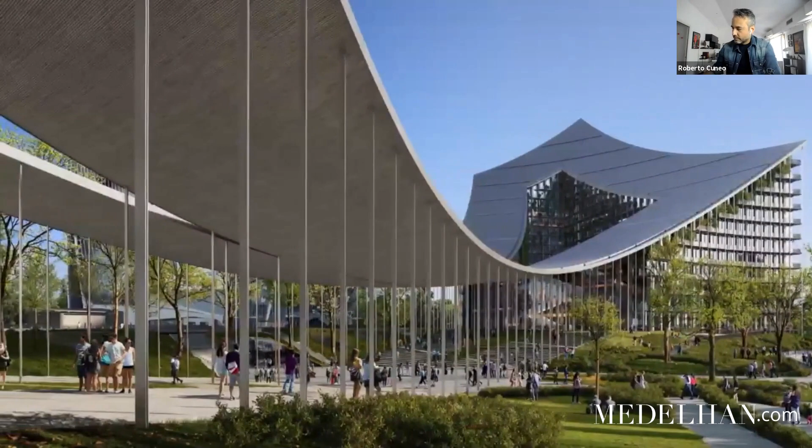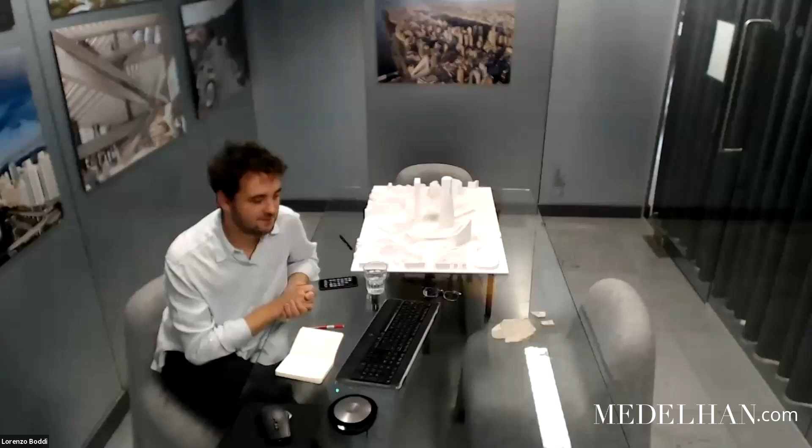Thank you very much, it's a great pleasure to be here. Thank you for the introduction, really a high, good level introduction. Thank you very much, it's a pleasure.

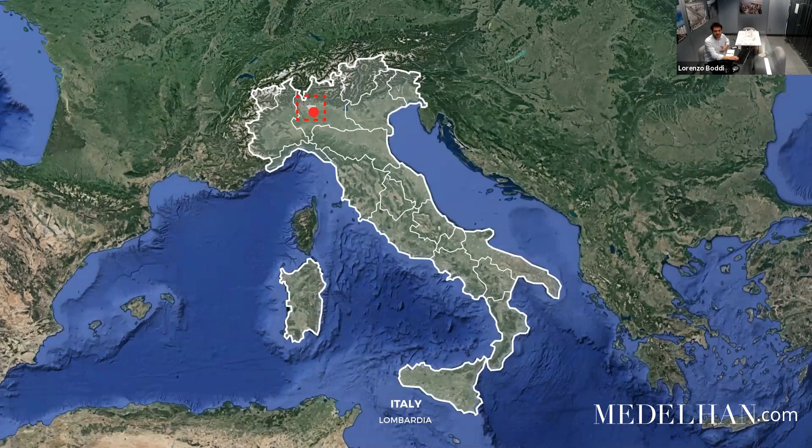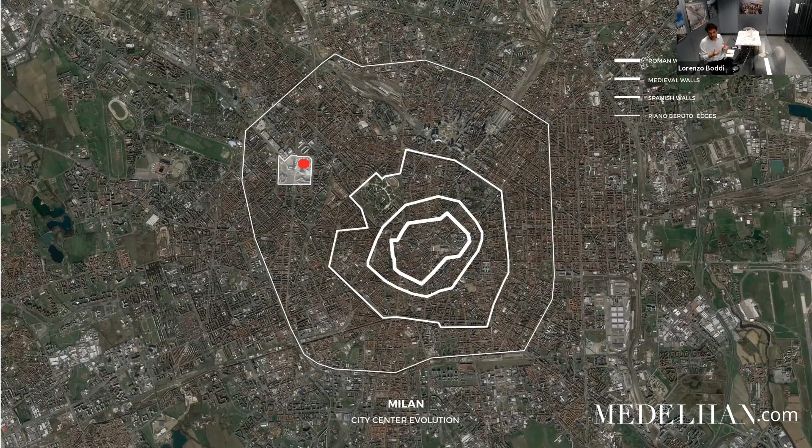The CityLife site itself you can see here in the red dots. These circles are actually the walls of the city, and the last circle is the Piano Beruto of 1884, which is when Milan exploded in terms of demographics. So the site is outside the historical city center but inside this historical area—a very central site in the current development of the city.

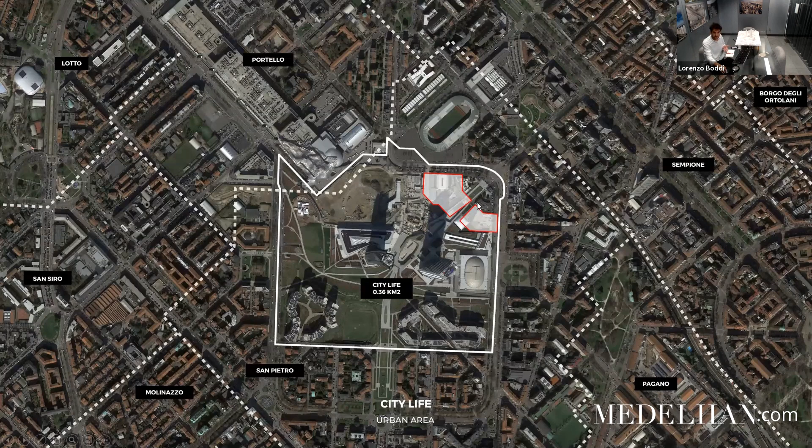This is the plot itself. It used to host the city fair back in the days, and it's been through one of the biggest projects of urban regeneration in Europe—about 0.36 square kilometers. It's a big site, mostly completed, but these two plots were where we were intervening. They're separated by an element where we couldn't build, which I'll explain a little later. That's a constraint you can start seeing from here.

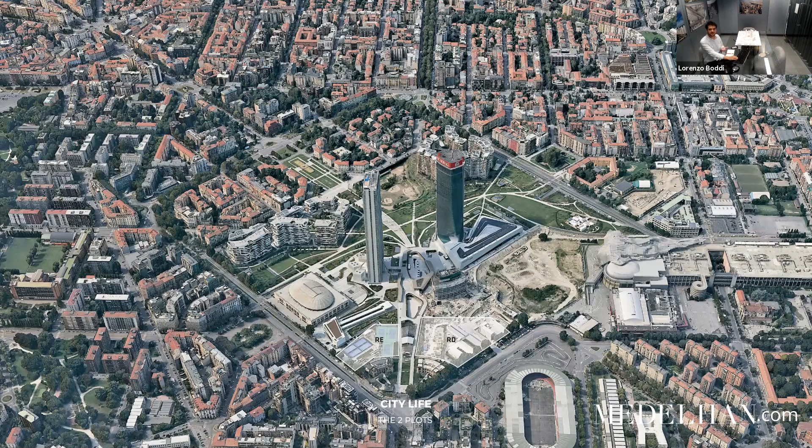One of the main aspects when you go to CityLife is, of course, the presence of this great park, but also the presence of the three towers. One is already completed in this picture; it was under construction at the center, while the rest is lower building. These three towers are done by three renowned architects—Hadid, Arata Isozaki, and Daniel Libeskind. So we had the responsibility to make the missing piece in the puzzle of this great urban regeneration project.

Here you can see the two plots. Now they're playing padel and tennis there, but in the future it's being relocated, and work has already started on the site. The two plots are leading towards this central architectural grand finale in a way—they're really standing in the city itself.

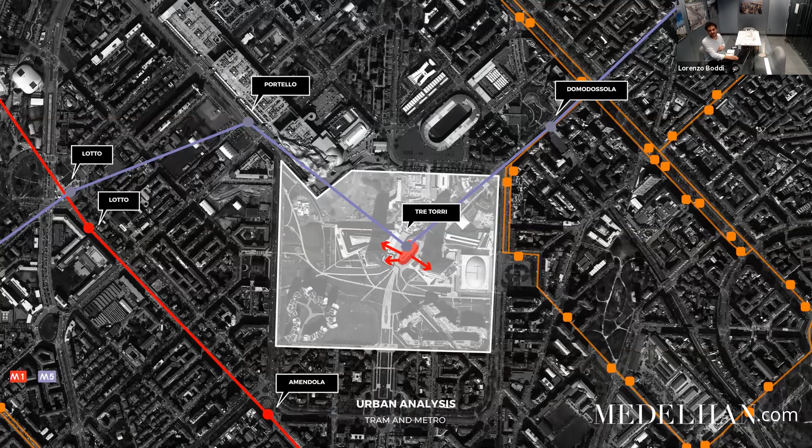Talking about this part in the middle where you couldn't build—one of the constraints—you have the presence of these three majestic objects, and at the same time this gap on the two sides represents more than one aspect. One is, of course, infrastructure: you have one of the metropolitan lines, what we call the tube in London, in Milan it's line number 5. At the same time it's the access and drop-off point toward this transformation area, while the rest doesn't have that.

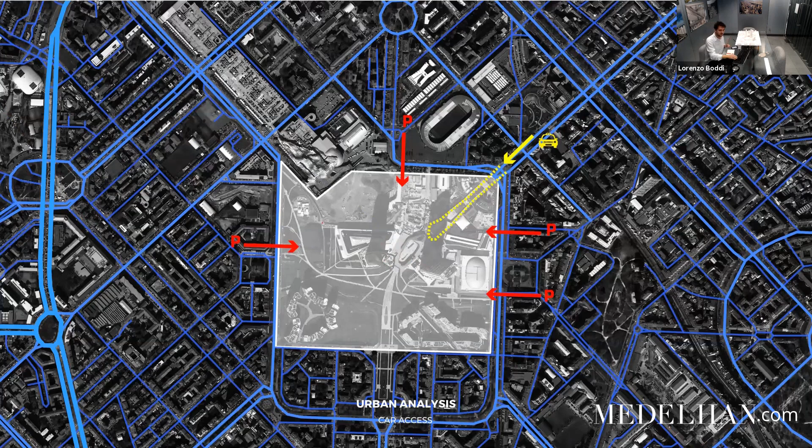You see it's all white while everything else is blue in this diagram—the blue is the vehicular traffic. There are no cars here; they're all underground. Everything is pedestrian, so this entrance point, this axis in the middle, was the exception. You can see here all the pedestrian flow.

So it's a great park—incredible, one of the largest parks in the city of Milan itself. It's all suspended on the circulation below. And then we started thinking in our initial research about why we actually couldn't build there.

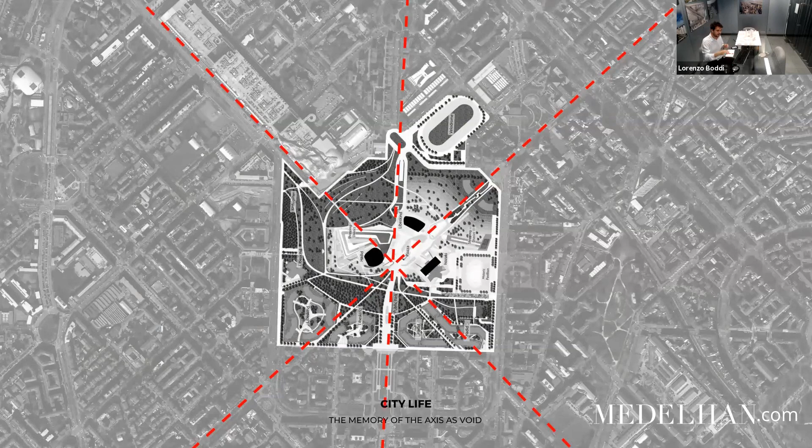It's not only about the metro. Historically this central axis was an important infrastructure, because back when the fair was there, it was the infrastructure leading and distributing to all the pavilions. You can see here the central axis leading to all the pavilions—an important historical axis. Nowadays it's still there in the form of a void. If you look at all the development, it's missing the central part—there's a void, together with the other axis, in the central part that's now called Piazza Tre Torri.

So there's a presence of the axis—this was one of the main inspirations at the beginning of our research. We started looking at axes in the city of Milan and also in urbanism in Italy generally, and usually next to an axis you always have two buildings, often twin buildings, like in this case. This is one of the first skyscrapers in Milan, at Piazza Piemonte.

It's a very old picture. Or in Piazza Larengario, obviously in Milan, where you have two twin buildings, again divided, creating an entrance to axis, or Porta Sempione.

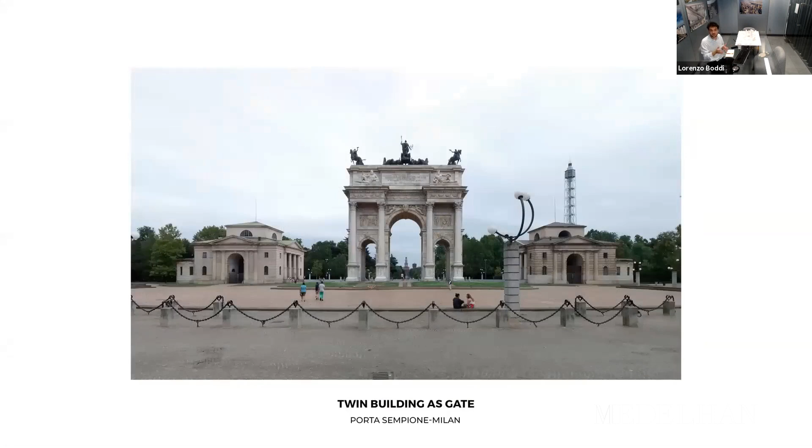But of course you have a corso, usually an axis when next to a porta, so there is a gate, an urban gate in the city of Milan. It's called corso, and in this case it's really a gateway, an entrance, a gate. So this idea of the gates, the idea of the axis, the idea of two buildings siding them, it was actually starting to come into our mind. So we really start thinking about the context.

Another aspect of the context, of course, is the height difference. This is a map that represents the lower and higher architecture of the surrounding. The red is really high - you can see the three towers, they're the only ones. While the surrounding buildings are quite mid to low rise, about 5 to 10 stories high. So it's really the only element that's tall is the one in the center.

That was one of the biggest challenges, basically the biggest risk of the project itself. But then we start thinking, is it really the right thing to do, also in respect to the 3 towers in the center? We can't really beat them because we can't do something taller than them. How can we actually - we start playing with different typologies, something we often do, and we find out that the same amount of area could be organized in 2 low buildings organized around a central courtyard, much more similar to the surrounding itself. It's a classic Milanese, but also European typology, the courtyard building.

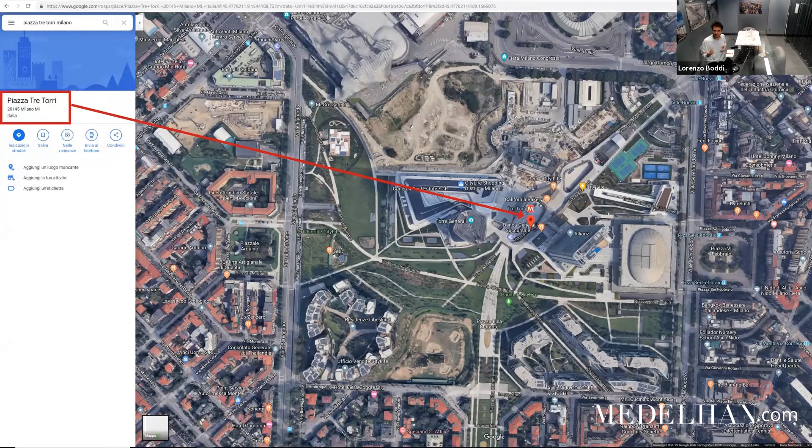At the same time, we also start running some jokes in the office, because the station and the plaza in the center is called Tre Torri - in Italian it means 3 towers, you know what I mean? So we're like, okay, they're asking for a 4th tower. What are we doing? We're going to change all the name of the station and stuff like that. So it's like, we start really thinking maybe the tower is not the right thing to do.

So we try several iterations following this idea, the idea of the 2 buildings, the idea of the axis. And then I'll take you step by step how we generate what looks like a complex project, but it's actually very rational in its generation.

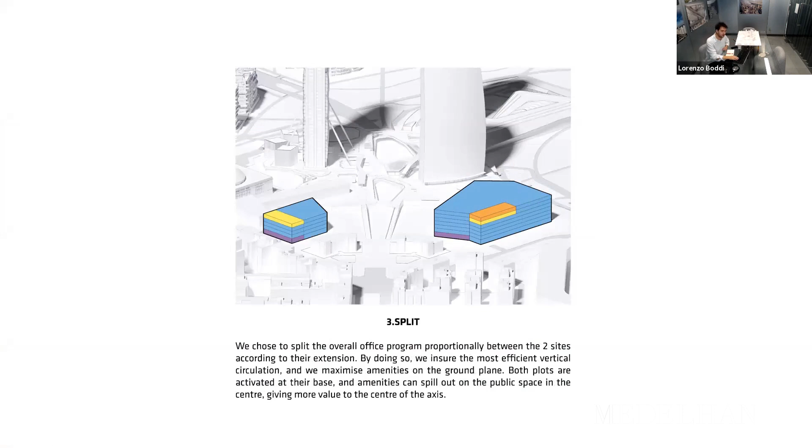We have the 2 plots, as I was saying before, with a buildable area in the central part. The program itself is a mixed-use building, but is office-driven mainly, so you have office and a series of amenity spaces and a few public functions. We decided from the beginning to split this program in 2, detaching from the 1 building only, having 2 buildings, and then organize them as a courtyard.

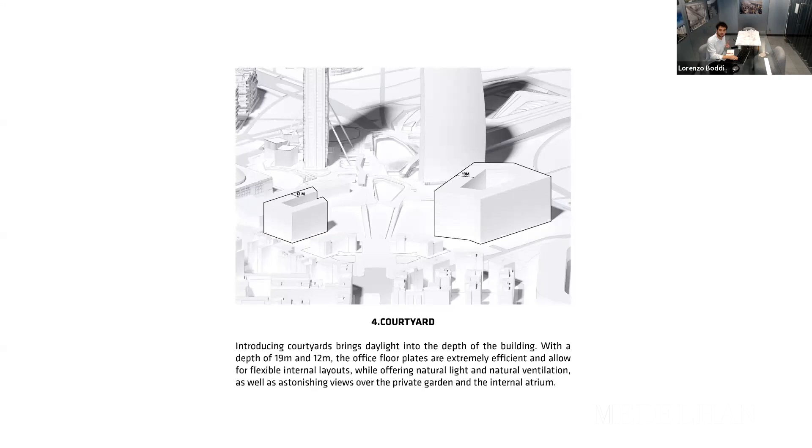Courtyard as an office space is usually not what you think about as a classic typology, but we think it's actually a great typology. You can have a depth, for example, of 12 or 19 meters in this case, that will allow natural light to come in while having a really large floor plate that will allow collaboration. So it's really a great typology for office, not only for housing.

Then you unify in a gesture in plan the building with a single gesture, as you can see here, and we did the same in section - I will come to this later. So in a way, it's a building generated by constraint and by surrounding in plan. And in section it's also generated by another constraint, because the curve that we use is a catenary curve, so it's almost like it is shaped by gravity itself.

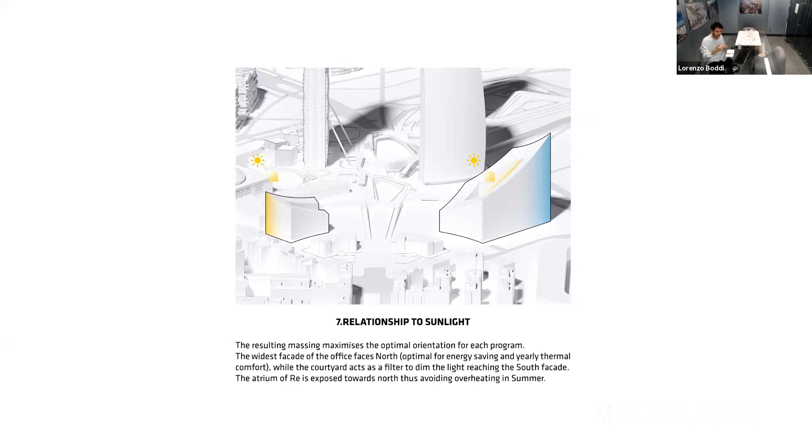And then by the found object with this iteration, we actually discovered it was a perfect office building because it had the biggest facade facing north, while the lower facade facing south, allowing light to come into the courtyard. While the smaller building, probably too small to have a proper open air courtyard, was formed into an atrium facing north. So everything started to click together in some ways.

And when it started to do that, we got really excited about the scheme itself. At the same time, it was creating an object that has a plethora of views toward the surrounding, towards the three towers in the center, towards the city center, the Duomo with the lower building. And with the biggest building, on a clear day you can see all the Alps, all the way to Monte Rosa. So it's an incredible view from up there.

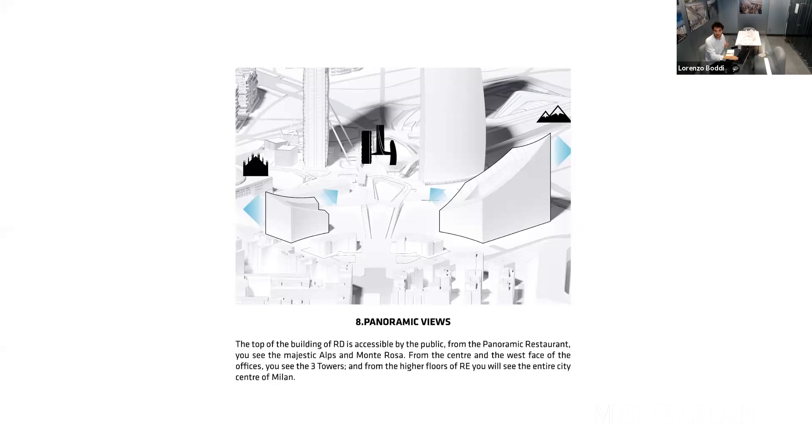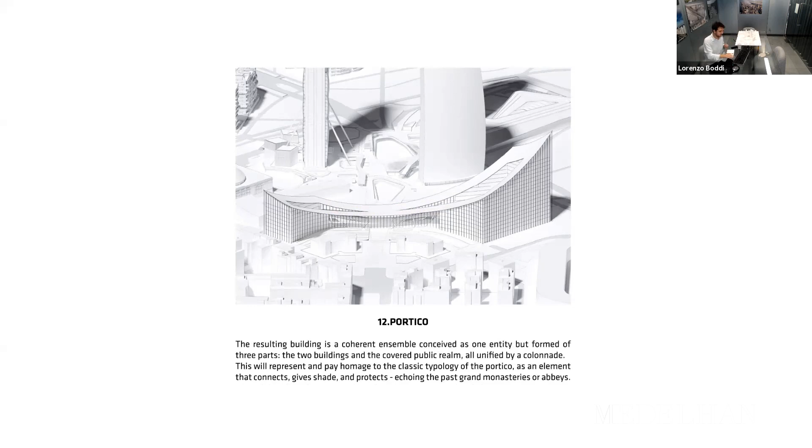Then finally, we transformed what was a constraint itself in the site, this unbuildable area given by the infrastructure in the middle, into a design opportunity. So we decided it was a way to give a gift to the city of Milan, to create a giant covered space that is actually a monumental stair you'll see later. And then we unified the entire facade with a series of very thin elements that are in tension.

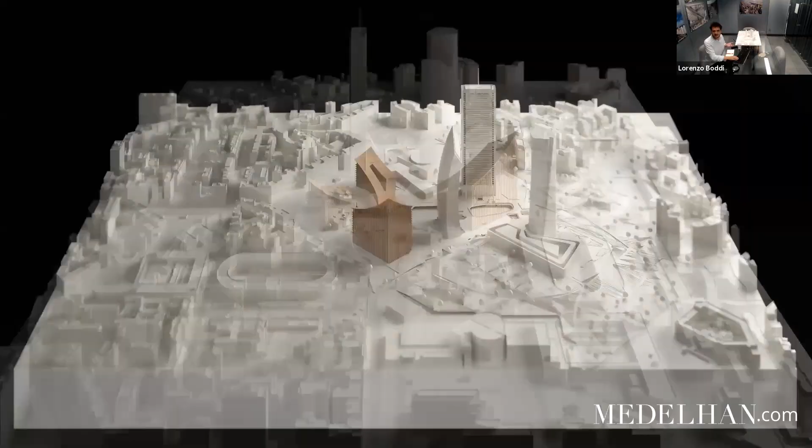These are all aspects I'll go through later following the project in more depth. So we started really thinking, okay, let's make something low, let's make something incredibly almost tame, to mostly merge with the site. But actually, when you start applying all the constraints, we found out this was an incredible landmark. I think you can see from this picture it's a building that appears different, very sculptural from every side, while at the same time it pays respect to the central part.

You can see here a model, and finally these are the images that we actually found ourselves, also after generating the scheme, saying like, wow, it's actually screaming, even if it's a lower building than a tower.

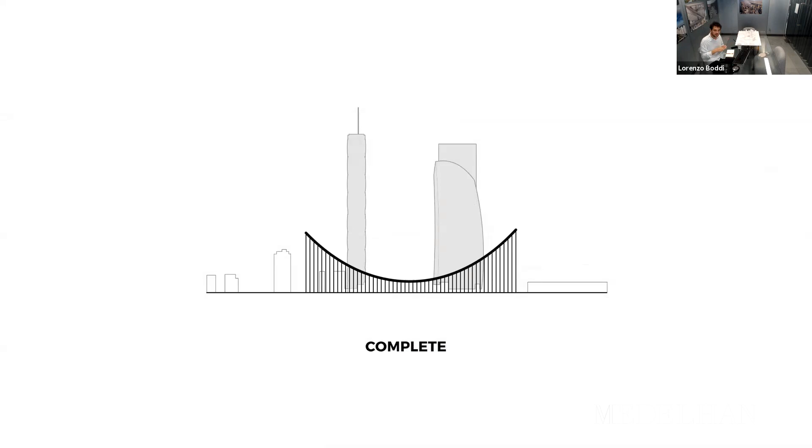So we can actually change this perception. The main idea was from the beginning, rather than try to compete with the three towers in the center of the space, to actually complete the entire regeneration project of CityLife, creating a lower building but also framing the three towers in the center, and creating this gateway to the side, to the entire urban regeneration project itself.

And you can see here from an aerial view how it really allows people to walk in from Viale Monte Rosa towards the central plaza itself, framing and creating a new gateway to CityLife.

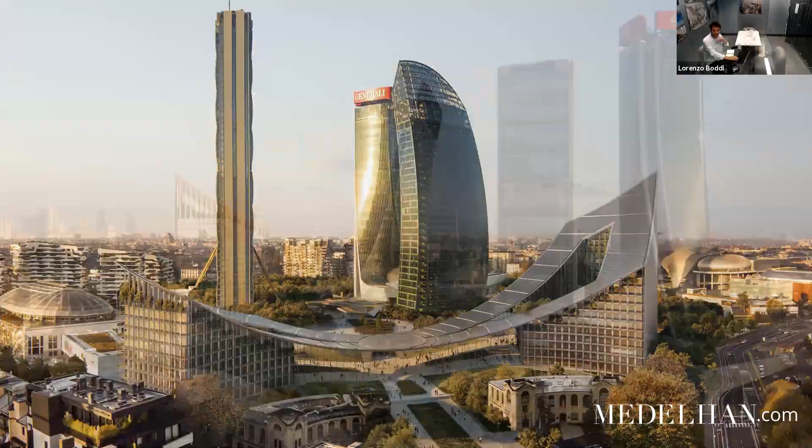While changing the corner of the views, you can have almost like a sculptural object in the park that is actually a sculpture park. So it's quite spot on as an object itself.

And here you can see also from street level how really this idea of a gateway, going back to what I showed you before in terms of inspiration, the twin building — of course, in our case they were symmetric, but here they are completely different. The idea of framing and creating this gateway in a central axis, you can see really in this picture how it was done.

We're talking about challenges, and definitely challenging the brief is one of the main ones, I guess. Every time architecture firms are asked to realize something which is not feasible or doesn't fit well with the local scene — I get that. When we did the competition, we were actually aware that either we'd arrive last or we'd arrive first. There was no in between. So that was the risk in a way. It went well, but that's a challenge as well. That's what makes architectural firms great, when they challenge the status quo.

Looking at the pictures, I see that one of the innovative aspects of the construction is actually the novel understanding of the portico structure, which comes out from the pictures as well. How did this idea come about, and how did you get inspired for this part? I'll take you through the overall thinking, first as inspiration for us, and then also some of the technical aspects and the big challenge, because that's possibly the biggest challenge of the project itself.

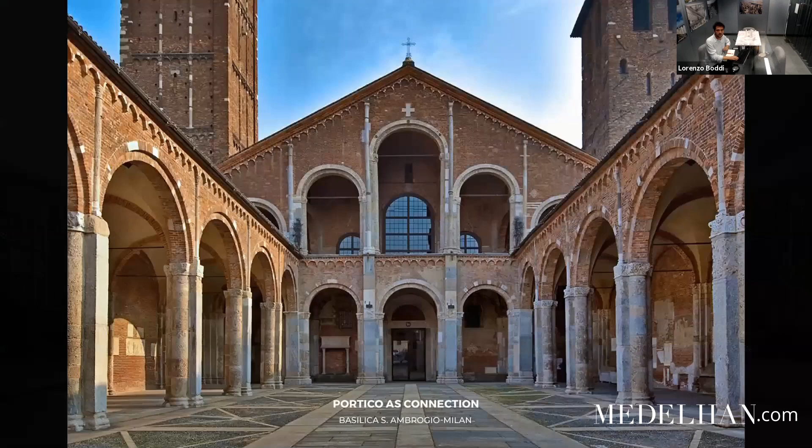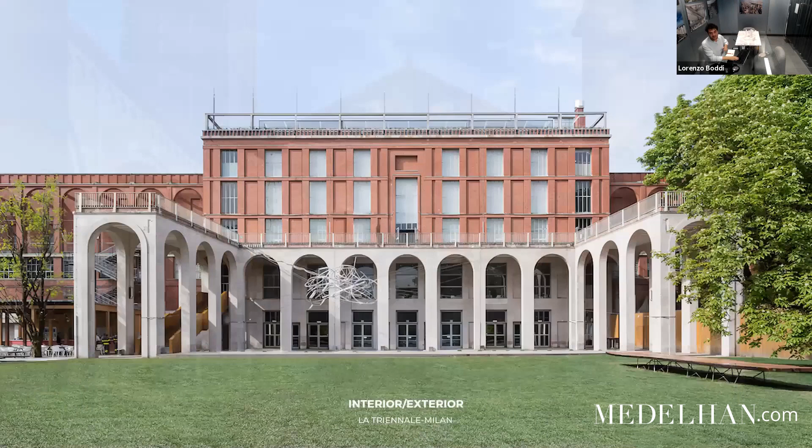Of course, the inspiration was from the portico itself. The portico is a device that in architecture, especially in Italy, is used to resolve a series of issues, and is actually a characteristic of our city. It's used, for example, in the Basilica of Sant'Ambrogio as a connection between parts of different programs. It's used in a completely different historical time - for example in the Triennale in Milan, as this device that blurs the boundaries between inside and out, so it's neither inside nor outside. It protects you from the rain, and it's a shelter, like for example in the Mondadori quarter. So I chose three examples of how the same device has been used in different times in the history of the city of Milan.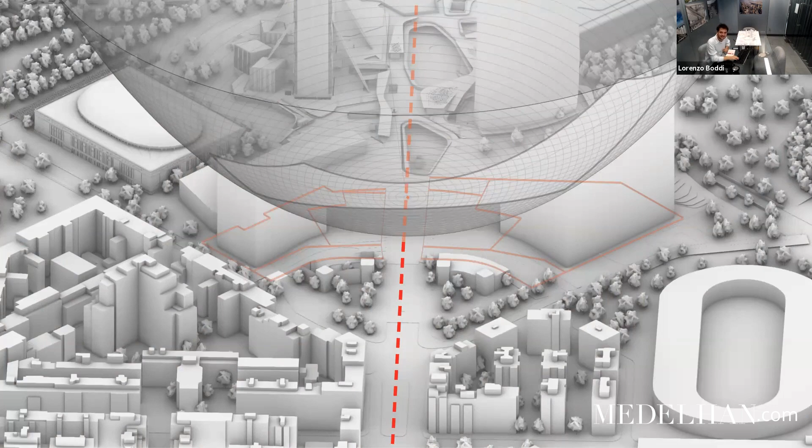How is it done? It's very interesting. As I was saying before, it's actually generated by gravity in a way, because the shape itself is generated by a catenary curve - a curve that is shaped by gravity itself - and it's revolved towards the central axis. You can see here in darker gray the geometrical element that's been subtracted from the shape itself.

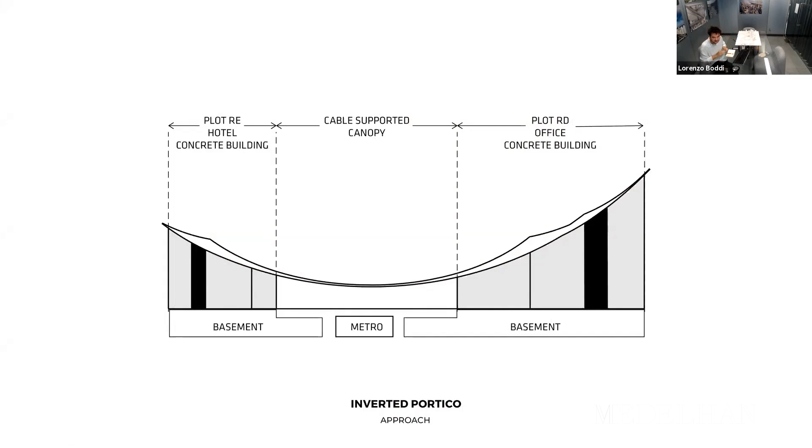You can see here how the two buildings - two relatively conventional concrete buildings - have this spanning element in the central part, where there's the non-buildable area and above, the metro line. This suspended part is so lightweight, because we wanted to do something incredibly light, but it was so light that basically it was suffering from wind uplift. So usually what you have as pillars in the traditional portico we saw before is something that holds the roof up, but in our case, we needed something that holds the roof down. That's why we started calling this the inverted portico.

So it's the same typology, the same inspiration, but reverted in a way. You can see a section showing how the spanning part works between the two elements. This has been done first with our engineering firm, BE, and after with Holzer Bertagnoli, a local firm - they're very good.

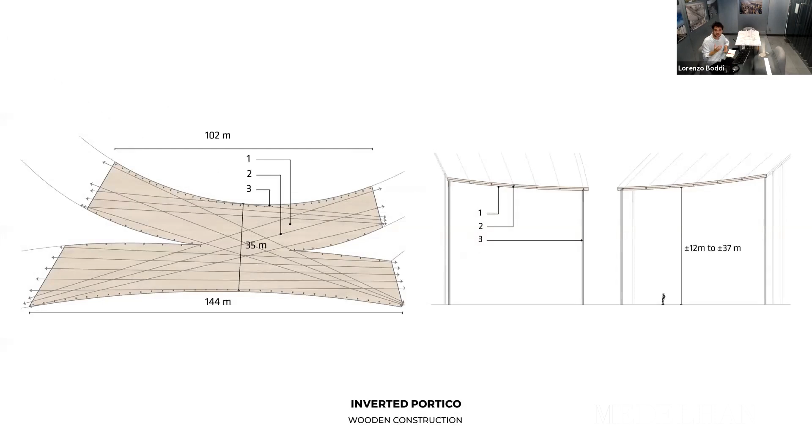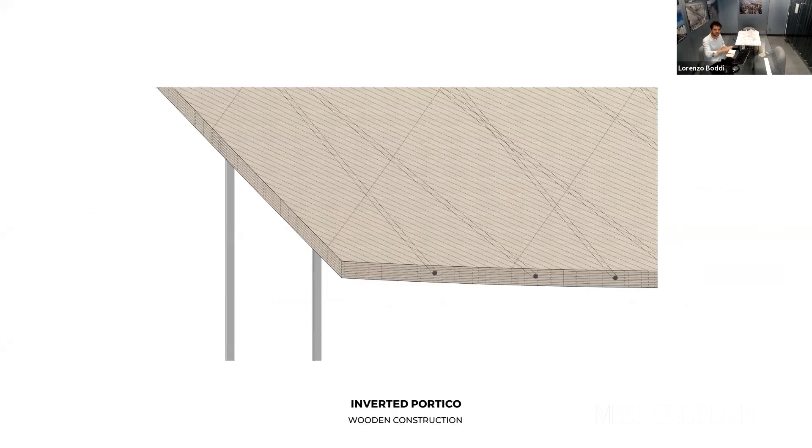And it's a wooden construction, so it's also very challenging in that sense. This is solid wood - a lightweight construction made of solid wood, together with cables in the central part. So basically, it's almost like a homemade CLT: you lay a series of solid wood elements in one direction, then lay another layer in a different direction, and so on until you get the thickness that is needed.

In the central part, there's a space that allows cables suspending from the two sides to take the gravity loads. At the same time, the wood enters inside the building, really unifying the suspended element outside with the more conventional of the two concrete buildings - which aren't conventional at all in terms of the picture, but are more conventional in terms of construction.

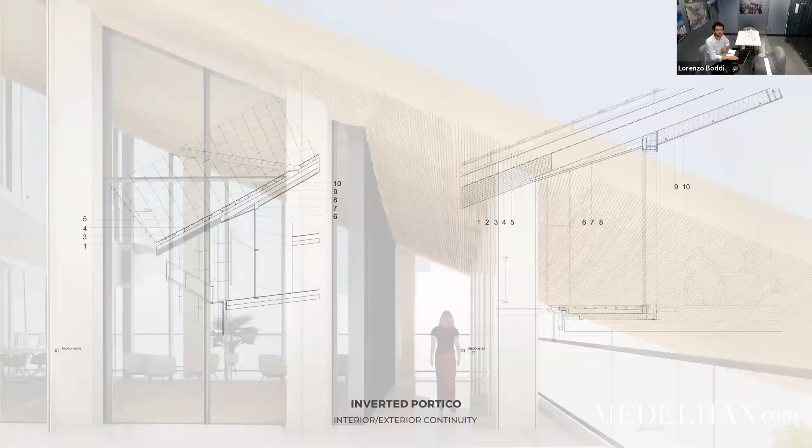You can see here - I'm not going to go deep on this - but how these two elements actually join, between the building and the canopy. It's a lovely idea, and even very impactful. I definitely see it as a gate of CityLife from that entrance, and it's wonderful to see how ingenious it was to find this kind of solution.

And we're talking about a building which is going to host offices as well. Yes, and I guess that even the common areas are something that got you to work on them.

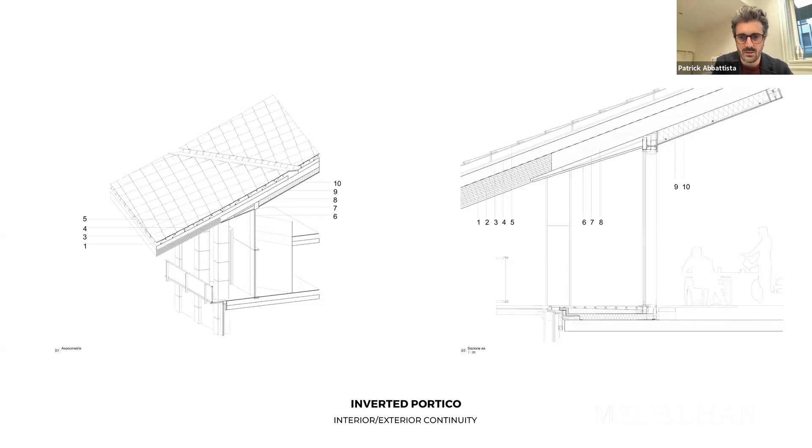Also, since it's not a unique brand building like the Google one you did, I suppose all these common areas are fundamental to generate life within the building, and also generating the possibility to connect and contaminate its inhabitants. I wanted to know how you've addressed this part in your projects, in the CityLife project.

Yes, that's a great point, Patrick. I have a chapter for it because the common areas are at the heart of the building, and common areas are getting more and more important in the office environment, not only, but actually in the office world they're getting more important.

Even more after what we've seen in the pandemic. So in the post-pandemic, what we can think, predict or try to predict, the office space of the future, the post-pandemic workplace, will have a great central core.

You probably experienced this. We did this project entirely almost in lockdown, so it's a project born during lockdown. Somehow at the beginning everybody was happy going home, staying close to loved ones, and being more free, having time to do a lot of things you didn't have time for.

But after a bit, especially the younger generation, you really feel the need, especially in work like we do where collaboration is really important, to be together and share moments. Even though the project was conceived before the pandemic, it's proven to be a resilient typology because of the common areas itself.

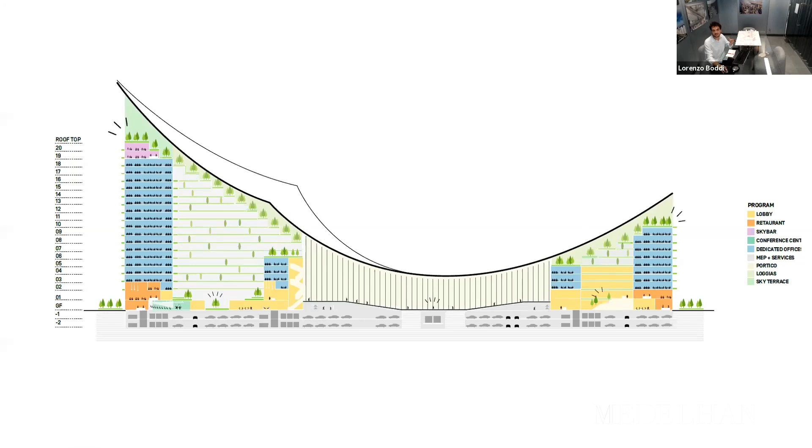The courtyard itself, of course, as common area, and the atrium in the building facing north - we call it the Milanese courtyard in the south facing building. I'll take you through one by one because they're really one of the biggest and most important aspects of the building itself.

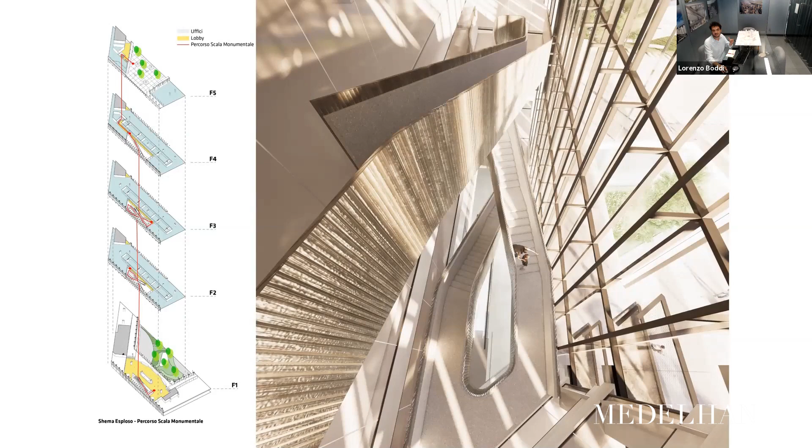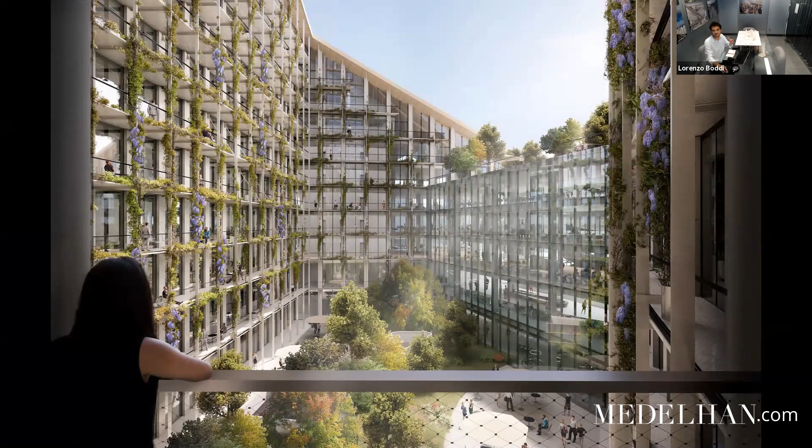Second one are the two courtyards. This was one of the advantages of not doing a tower. Of course, you can make towers with a collaboration space too, but in this case, having the possibility of making a lower building with a great shared space in the central part, it was actually a great occasion.

A courtyard like Ca' Granda in this case, or on a much smaller scale, for example 10 Corso Como, which was a great inspiration for us. We will see later also.

The courtyards will differ from the outside. We have this lush nature, so they are very, very green - I'll show you later how this is done. So it's very green, but still lightweight. They are also the heart of where all the air of the building will get through it.

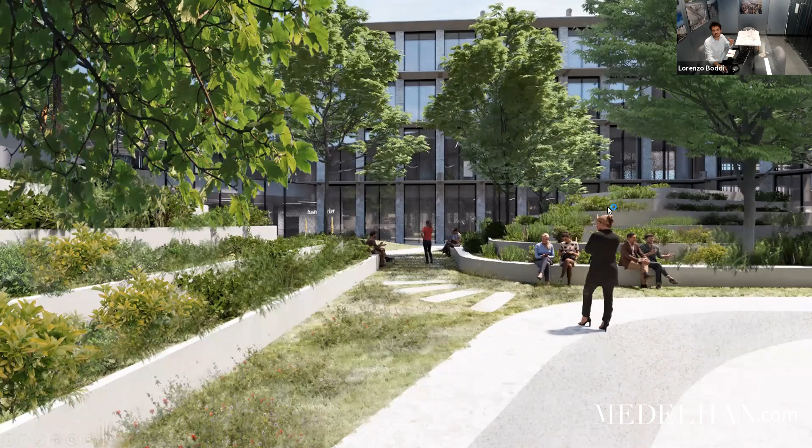Even some of the aspects - these are two elements, the chimneys you use for MEP, we turn into a possibility and a mark inside of the courtyard itself.

Going through, that's the space I was talking about before - the residual space in between the canopy and the slab, we left it empty, and next to it we always place a loggia that you can see here. It's also very green, an outdoor space where you can go out and exchange ideas with your colleagues.

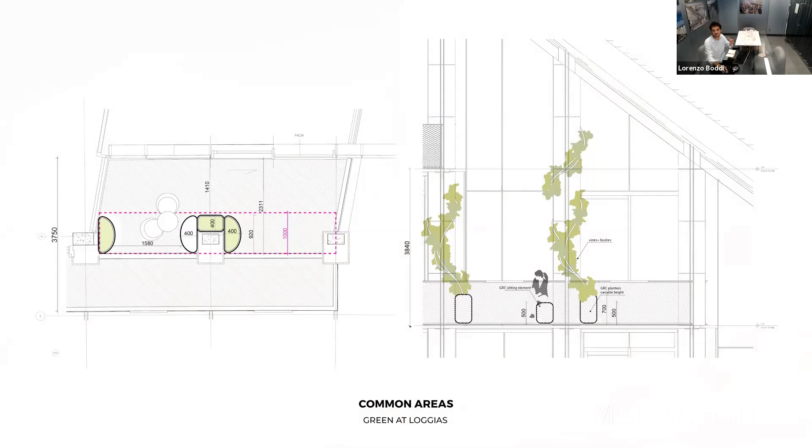This is some of the detail of how we achieve this even with the lightweight construction. This is done together with our landscape department, and we achieve actually this green appearance.

This is an interesting point because we could have actually left the slab touch the roof, but we decided, for the places where the height was not too generous, to remove the slab itself. This creates a cascading series of office spaces where you can work, and even in a multi-tenant building, or a single tenant building, you can see people working on another floor, maybe in another department, meet each other, wave, and exchange ideas. We think ideas could be generated from this.

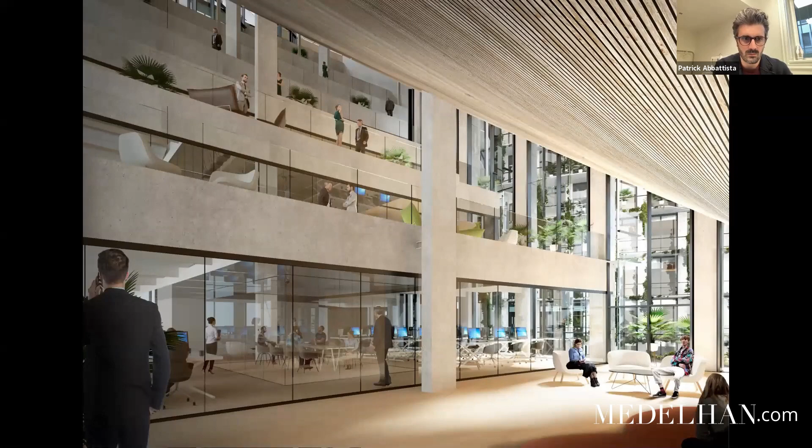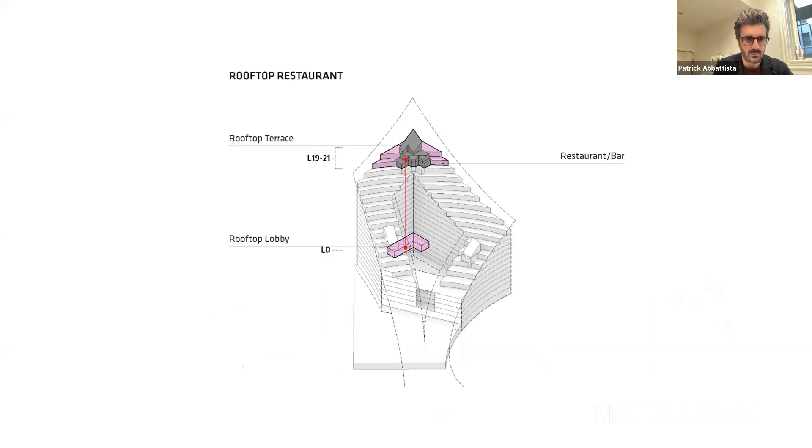So the culmination, as a grand finale let's say, of the common area: the last two floors have a rooftop restaurant that has its own independent connection, its own independent lobby, and it culminates in an incredible terrace from where you will see the entire Milan.

Again, this has been possible because usually you have the MEP on this level, but the organization of the building itself, being in a low rise, makes it much easier than in a tower for services, air, and all the systems. We could leave this free, so it was an early decision that made this possible.

And you actually have this incredible space. You can really see from here, you can see Monte Rosa during a clear day. So we think that common areas are really one of the main aspects of the building from the public.

An example of the portico running all through inside the building. And I can't wait to visit the restaurant when it will be live.

We are talking about common areas, and of course common areas, as we were looking at the slides, can be indoor or outdoor, and we know that the relation between indoor and outdoor spaces has changed in the last years. From your point of view, how does this project interpret the research for a new balance between the two?

Yes, well the building is really organized, as I was saying, as an extroverted building. It's introverted because there's a court—it's funny, there's this kind of contradiction—but it's extroverted because there's really always access to outdoor space. This has been done mainly through the facade system that I'm going to show you now.

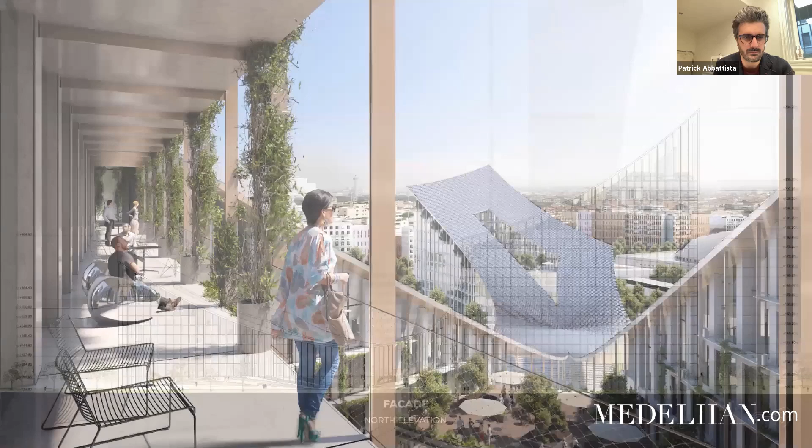You can see the building really starts from around 20 meters going up to 100 meters, and it's all surrounded by a series of balconies. So everywhere you have a really lightweight balcony next to your desk where you're working—next to you there's always a balcony you can access. In this case these are the largest ones; some are slightly smaller, around 1.2 meters, these are 2.4 meters, so very large spaces, as you were mentioning before.

Nowadays, I was talking about common areas before as important for collaboration in the post-pandemic work environment, but of course access to natural ventilation and breathing fresh air got more and more important. We always like to think: if you go to work in a completely sealed office, like a tower back in the days with no access to outdoor spaces, you work there for 8 hours and don't actually have contact with the outside. It could be anything outside.

So if you think about it, it's the same as taking a flight from here to New York. And if you think about taking a flight, it's not the most pleasant experience—of course you watch a lot of movies, but if you're working every day, it could be quite tough.

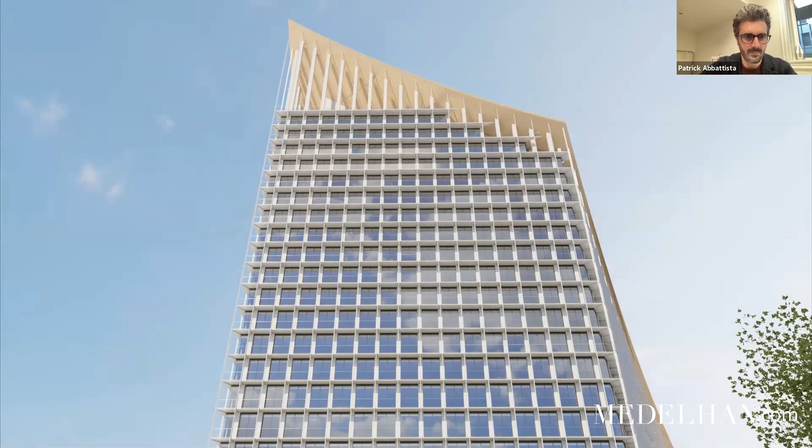Finding a spanning element of 3 meters in natural stone was not that easy. The way we achieved it is actually very interesting, because the facade itself is made of glass and natural stone in the vertical spandrels. In the balconies, we use the leftover material that you get during the production of natural stone. I have some here, and they're not big enough for the facade, but we use that, combined with ultra high performance concrete, to create slabs that are basically similar to the stone itself, because they're made of the same component. We managed to span 3 meters with only 65 millimeters, so we're talking about a really thin and lightweight element.

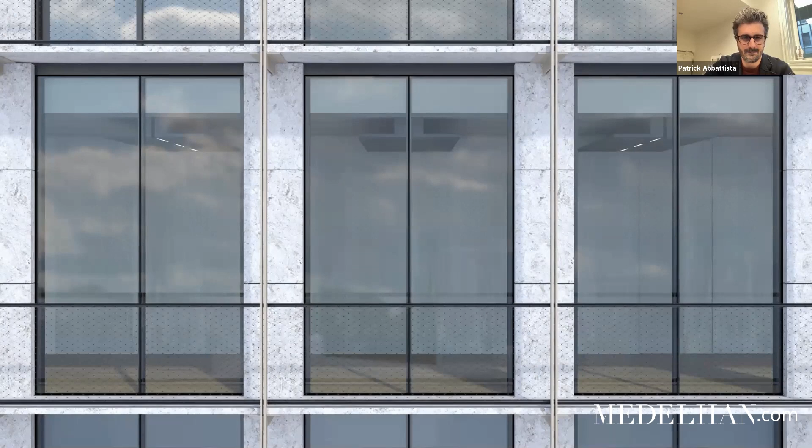All the balconies are hanging from the top. We talked before about the canopy, the inverted portico, where you have columns that bring down instead of bringing up the roof, they keep it down. In the same way, in this case the elements are in tension like the canopy, but here they're actually suspending the balcony. All the balconies are suspended by this hanging element. There are two blades of steel. You can see here the facade system with the two balconies.

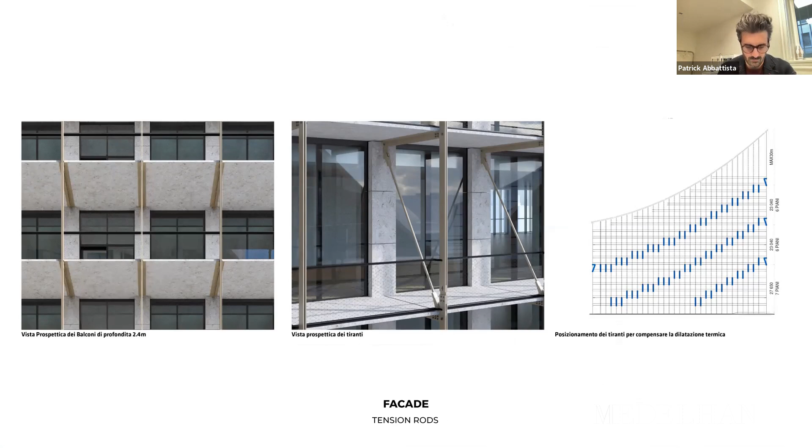Talking about challenge, this is not an easy thing, because you have a building that is almost 100 meters tall, with a lot of deformation. These elements have to be in tension, so we had to intervene every 6 meters, every 6 stories, where you can see in the diagram a series of tension rods that will balance this deformation and keep the balconies able to resist it.

At the same time, we went quite crazy on detailing, because we started playing with these two blades of steel, and how this system, almost like a mechanism of parts, allowed us to detail the different functions they have to achieve. Like where they meet the roof, or where they meet the ground, they have different functions, where they have to sustain the balconies or the handrail, or for example here you can see the base of the courtyard for the greenery.

Yeah, it was great to see Casa di Ringhiera. Because if you think of the first lockdown, you can remember many Italians being on the balconies, singing and hanging out, trying to be in touch with other people. The kind of common area is something really alive. Exactly, and we were actually doing that while we were in lockdown, so it was really one of the main components. We saw really the importance of this part, people cheering from balcony to balcony. Yeah, great to see it.

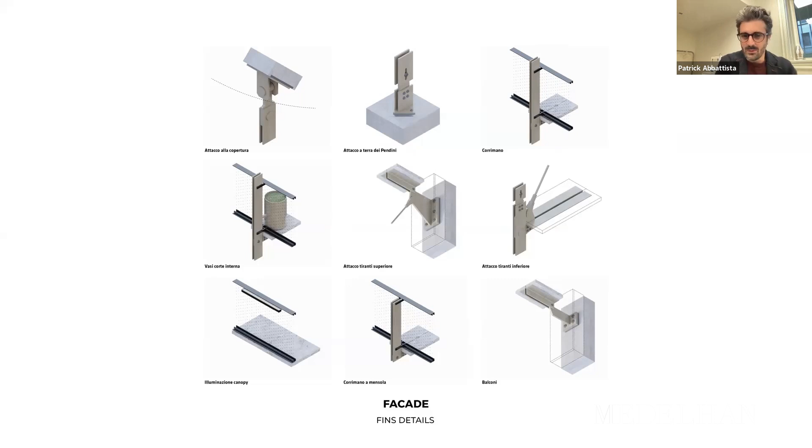And talking about interiors, you know, BIG is pretty well known for its attention to materials, and I would love to know more about the choice of materials in this specific project. How did you approach it?

Yes, as you said, we really care about material. We try also always to find something that is not always straightforward, but that actually enriches the project itself. This is the concept, I'll take you through it. The main concept of the interior part was done in collaboration with our interior director Francesca Portesine. She's actually Italian, she couldn't be here today to explain herself, but I'll show you a little bit. Again, this idea of blurring the boundary between inside and outside is reflected in the interior itself, because we envision the portico, we call it like a wave now, as a really permeable structure.

So almost like a door, a pavilion, something really light, something that lets the outside come in. One of the inspirations was actually letting the atmosphere and nature come in, creating the background for the interior.

Nature, of course, in Milan. Nowadays it's almost become the capital of this typology, inventing something with Stefano Boeri and the Bosco Verticale. But also back in the days, Milanese often say Milan is a city with hair, because in the balconies a lot of vegetation ends up growing. We took inspiration from that, deciding to let nature and the outside of Milan come in, almost the opposite.

So we try to combine these two elements, letting the outside in together with a series of rich materiality that you can feel and experience in a lot of architecture in Milan, historical architecture especially done in the 50s - I'm talking about Ponti, Portaluppi. There are tons of examples, usually expressed mainly in the lobbies, always with a juxtaposition of materials like marble together with bronze, together with wood, a real richness.

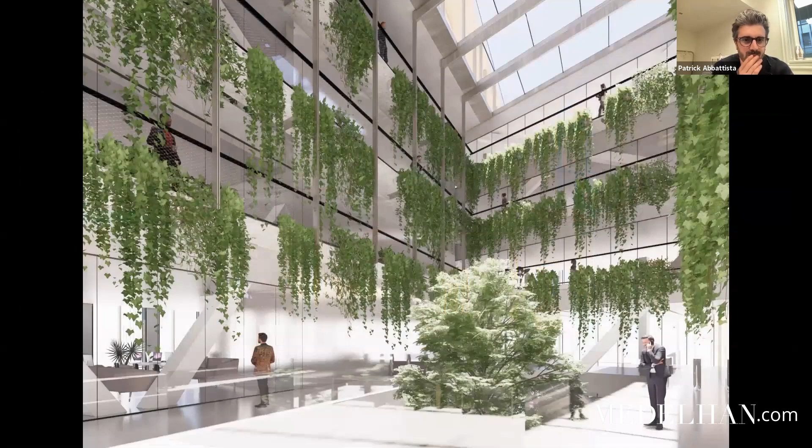So we combine this idea of the background given by the atmosphere and the green that comes in together with the object itself. This is one of the two lobbies - there's the atrium one, one to the courtyard building that is outdoor, and one enclosed atrium of the smaller building. Even here, the idea of the casa di ringhiera, houses with balconies for exchange of ideas and communication, is reflected, also through the presence of green. At the lower level you'll have, for example, a proper size tree, like in this case.

And this is going to the other building, the bigger one, the lobby itself - you'll see the open courtyard on the back. Again you can see the difference between the background elements - the slab of the soffit and the floor are more neutral.

The soffit was a big challenge, especially of coordination between us, our local architect Atelier Verticale, and the MEP consultant Manens-Tifs from Padova. Great coordination was required, because what you see on the soffit is pure structured concrete, but you still need to include elements you have in a high-rise building - sprinklers, speakers, smoke detectors - all channeled and organized in a series of slits together with the lights. It's really a neat element.

And then you have this sculptural element, rich in materiality, like the desk popping out, blending in conjunction with nature. These are some other interior images, again this idea of a more ethereal type of material reflecting light.

Another aspect was differentiating cold materiality - on the ground floor we have galvanized steel, a material usually not used in interiors, more industrial, but we find it can actually work in interiors, almost like a metal version of marble. You have two opposite worlds - the warmth of the wood, used for hospitality spaces, and the cold of the metal outside. We also played with the idea that the conference center at the base of the building could be an object that transforms itself.

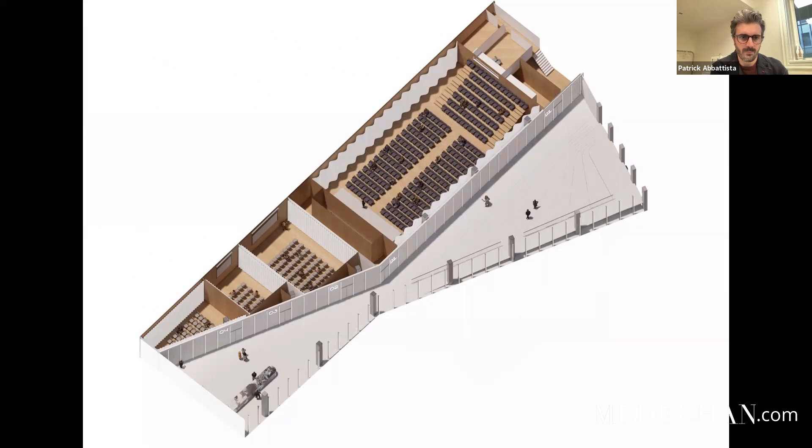So you can actually pass from a more conventional type of auditorium with seats, and then the seats will disappear on the ground and on the side, and even the side will actually open up, creating this completely new type of space that is very flexible. We like to think that one day during Milan Fashion Week, you should actually have a catwalk like you can see here.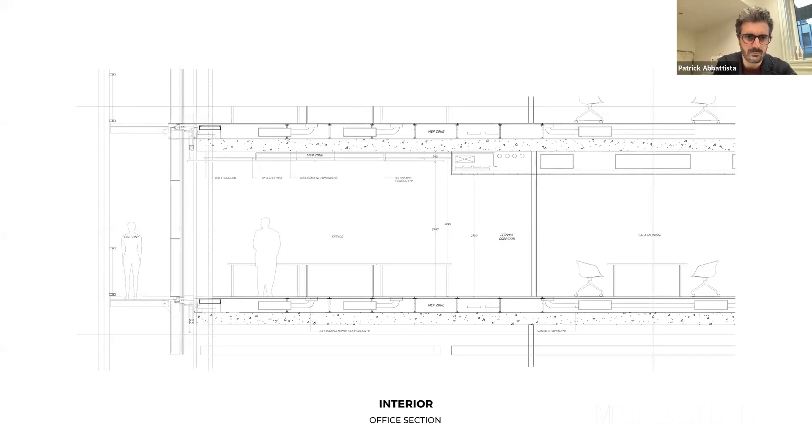We try floor to floor of 3.8 meters, but at the same time, by organizing the mechanicals all in the center part and at the bottom, we managed to leave the space close to the window with 3.2 meters clean. So we're talking about 3.2 meters clean of pure ceiling height and light coming into the building in a 3.8 meter building. That was a really, really big challenge, but I think it will be incredibly important for the workers and for the quality of work, daylight, and this relationship with the outside.

So from here, you'll be able to see the courtyard and the surrounding park. These are two other images of the office space.

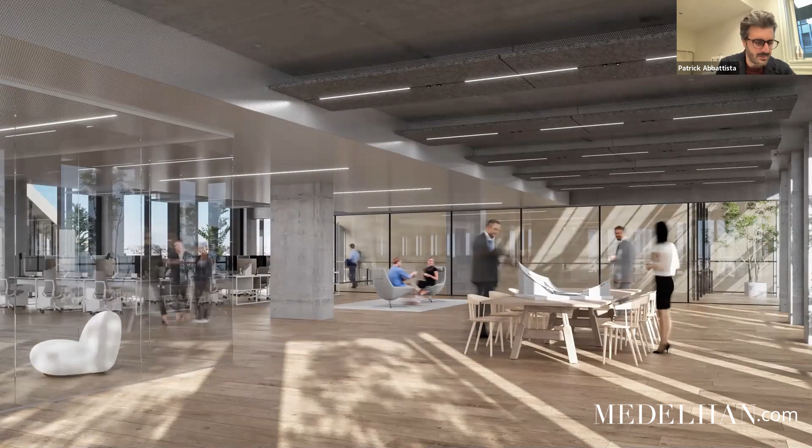Yeah, it's a perfect way to be connected with the external environment. We feel it, we need it, especially after these lockdowns where we've been forced at home. So I think that the more natural light you can get, the better view you can have.

That's definitely something that people are looking for. And that's why I wanted to ask you something about the landscape. I know that the CityLife project will have a new green space, and we know how much we've changed our thoughts about public urban spaces, with examples in Milano like Isola, which has completely changed in the last years. I wanted to know what is your response to this change, to this rethinking of open spaces?

Well, yeah, that's a very good point to introduce the landscape chapter. We were dealing with a new object, a new building, inside of a park. So it's a big transformation, urban regeneration project of CityLife, one of the largest parks in Milan. So we already had a park at our door.

So of course we decided, as you could see from the previous slide, to let the park enter the site itself, but also this idea of permeability of the landscape inside of the building and some of the space. So we're really blurring the boundaries between inside and out, like an extension of the inside and outdoor area. Even the portico itself is a space. This is a kind of gift, this gesture to Milan itself, and we think it's a gift to the city. It's a space that is neither in nor out. So it's really letting the landscape in.

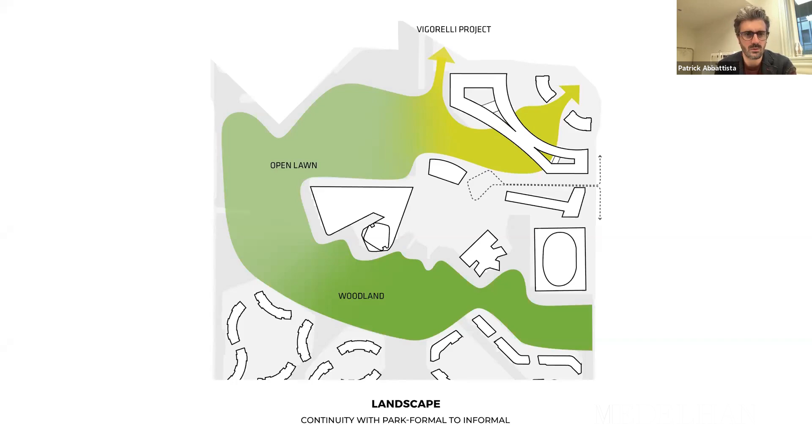So we decided to play continuity with the park itself, but also to revert a little bit how the park was conceived. We felt that parks in Milan in general are quite monumental, something you take a walk on and then look at incredible green - beautiful, incredible spaces - so we said, okay, maybe we can play something different in this case. We tried to play something that goes from formal to informal, from monumental space to more like an interaction space.

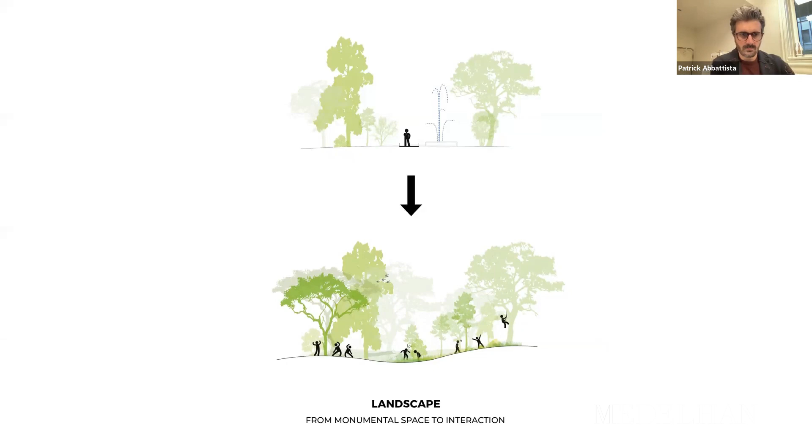We want the green to be touched, to be played with, and then to be used directly somehow. You can see in the image here, we conceived this green space almost in continuity with the interior. One of the challenges, and then I'll close on the landscape, is that it was not only a park that we had to deal with, but actually an infrastructure.

Because the building, all of CityLife is characterized by two levels. We have a higher level where all the towers have their own lobby, and then the city itself is on a lower level, five meters below. So the green space itself plays the role of an infrastructure connecting these two parts, and we try to do it in the most gentle way.

You can see how it plays this role by creating a space where you can take a yoga class and spill out into the office on the outside. You can take your laptop and work outside in the park for a bit. It's connecting again to the need for outdoor space we were talking about before.

I think it's really one of the key features of the project. Also the park is really a mixed-use park, so it's lively and lived in all the time. But talking about challenges, there was a need to create a connection in the portico, and connecting these two levels was not easy. You can see the site we found during the competition - these are the two plots on the right and left, where you have the tennis field and some construction on the other side.

These were completely detached, and actually blocked by two ramps. This ramp nowadays brings all the drop-off and taxis towards this area where you get dropped off, and then you enter the lobby of the three towers.

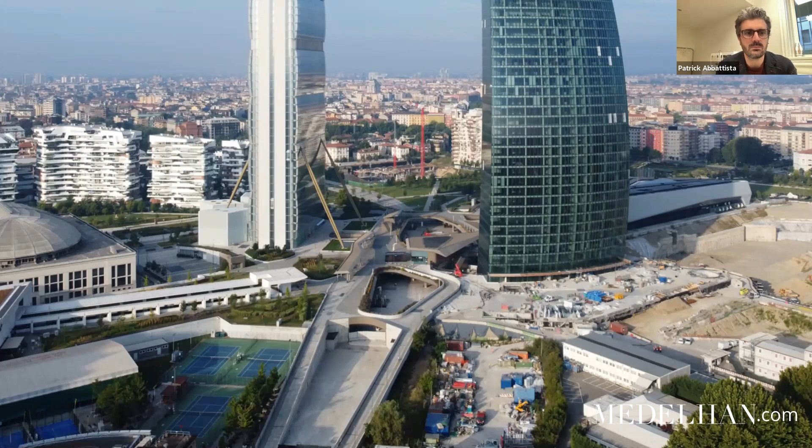We had to take a completely different risk during the competition, and we took that risk, and it paid off, because we proposed removing this ramp completely. Of course, we were also removing the drop-off, so we had to rethink the entire mobility system of the area, and unify the two buildings with a single gesture, but at the same time also unify the entire park itself.

So it's not only a connection in one direction from here to here, but you could go in different directions towards the park - again, from formal to informal. You can see how this is achieved with different types of connections. Particularly, it's accessible to everybody. On the side, you have a series of zigzagging paths, almost like a romantic path in the green, studied in a way to allow disabled people to go up with an easy path. So it's really this idea of making the two levels accessible for everybody.

Yeah, I mean, it goes in the direction of inclusive architecture in this case. Yes, and definitely welcome to a city like Milano.

We were talking about pollution before, about fog and smog as well. I know how much BIG cares about sustainability, and CopenHill is one of my favorite examples in this sense. I wanted to ask you, in what aspects of this CityLife project can we see this attention? Where can we understand this focus on sustainability?

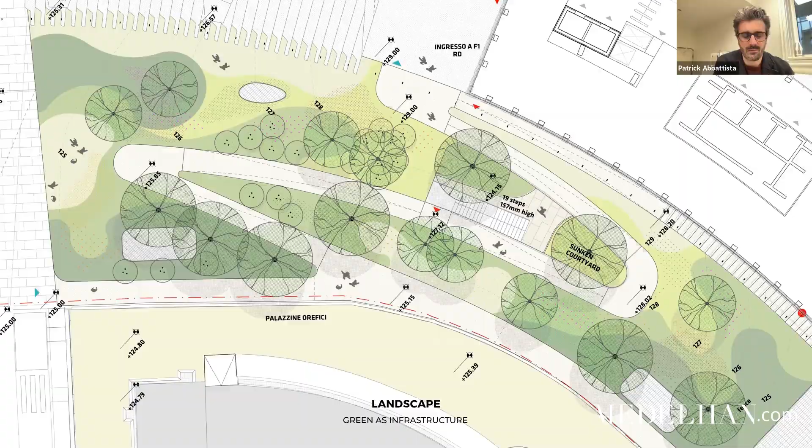Introducing the sustainability chapter, we touch on smog, and I'll tell you why. Milan is a city that, when we looked at the chart about air quality, we were a bit impressed by two things - one very negative, one very positive. The negative is that historically it has really bad air quality. The good one is that recent administrations and the city itself are completely changing. This takes a little time, but in Milan it's completely different now - we're talking about a city that is at the forefront of sustainability and enhancing air quality.

For the office, it means you require much less cooling. Same thing for the atrium facing the north side. While at the same time, the low sun in winter could be allowed into the court, into the office space on the southern part, but that's actually the minor part of the facade. And plus you have the balcony again.

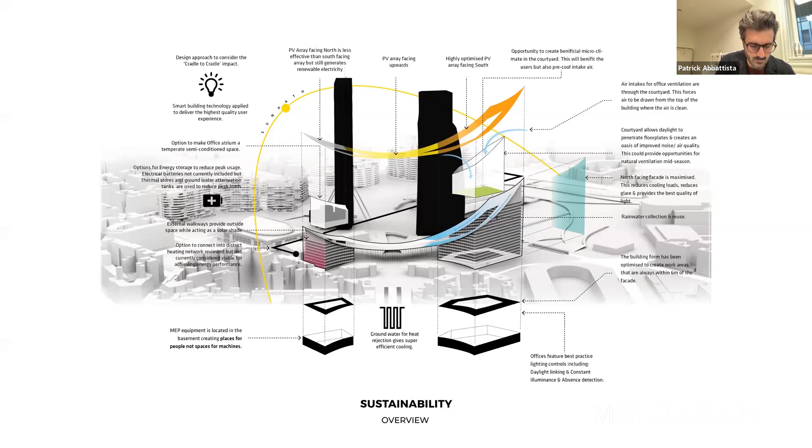We're reusing the same canopy to collect water, then reusing it for the green, but at the same time we use groundwater to cool down some of the machinery, so we don't have heat rejection at the roof. It's a combination of passive elements and active ones. I'd like to touch on a scheme that shows how the air is actually taken in from the courtyard itself.

I'd actually like to stress a little bit on the roof itself. We decided to clad the entire roof, about 11,300 square meters, with solar panels. They're not panels, but actually solar tiles.

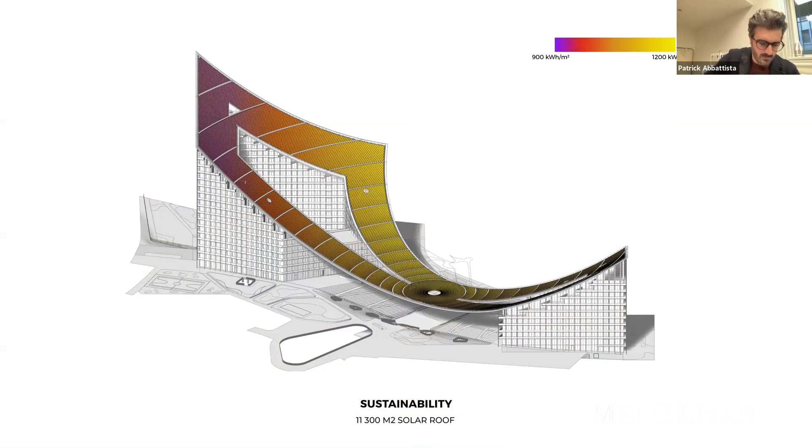The problem you often have with this type of project is that, in a way, they do very good for the environment, but at the same time they're sometimes not that great in integration with the city itself. First, they're not integrated in buildings. Often they're, pass me the term, a bit ugly. They're completely alien to the city environment.

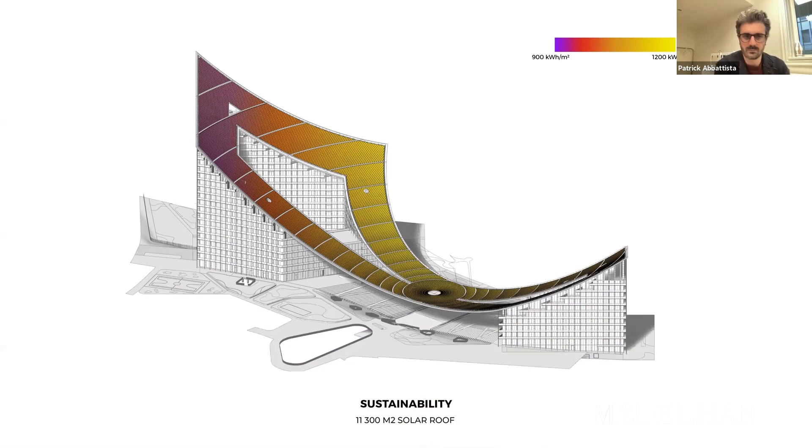So with our job that we're doing in California, we're developing together with a company called Sunstyle a series of tiles that don't appear overly technical but are very powerful and also very beautiful, in the sense that they absorb light so efficiently through a surface treatment that they don't look like classic crystalline PV panels, but almost look like slate or lead, like the classic materials that have always been used for roofs.

We're talking about almost 1,200 megawatt hours a year of energy production. So it's a massive potential reduction of consumption of energy. We're talking about probably around 40% difference compared with the standard office building.

So combined together with the passive solutions we have, avoiding the light, the presence of the balconies, the courtyard itself, the vegetation itself, we're aiming for, and have already achieved, the pre-certification on LEED Platinum, and we're running for WELL Gold.

This is very important for us, as we were mentioning before, and it's going to be a really incredible example of how new energy technology could be combined with and seamlessly integrated into architecture, creating a great landmark.

I would add beautiful technology, because we are used to amazing technologies which are not often that nice to be embedded in projects. In this case, the tiles look very nice. You can see from the picture it's not only a roof, but it's a facade for us. Also the geometry itself gives the facade the same importance.